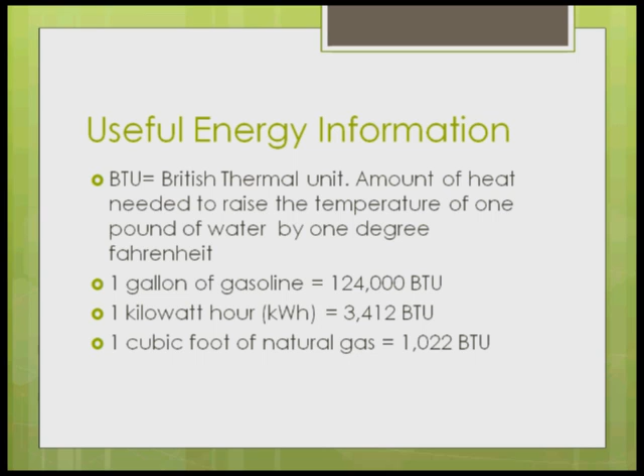So the energy used in a year for a car is 66 million BTUs. The electrical energy, not all the energy, just the electrical energy, is 41 million BTUs. So from this, you could say, well, maybe the car consumes more energy, 66 million versus 41 million. But don't forget that in order to produce electrical energy, we have to burn coal or gas. So if we account for that, a house consumes 130 million BTUs.

So the concept is, in order to produce electricity, we also need to use one of these primary sources of energy—that could be coal, or could be gas. That's why a house consumes 130 million BTUs in a year versus 66 million in a car.

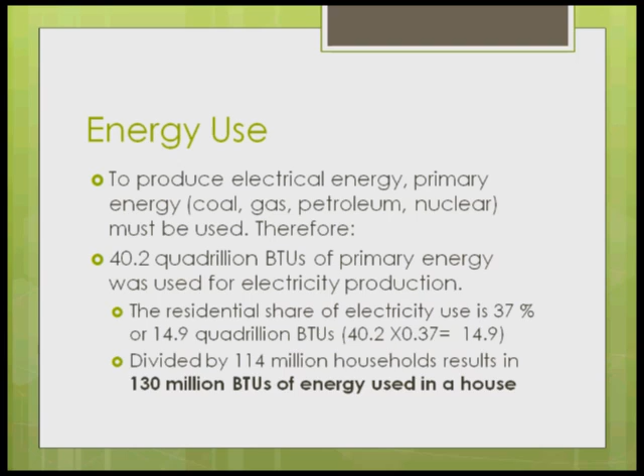Now, in terms of the agenda for today, we were going to talk about energy efficiency. How important is that? And sometimes we just talk about energy efficiency as an isolated topic. But I brought the topic of sustainability because sustainability is about the capacity to endure, to develop in a form that meets the needs of the present without compromising the ability of future generations to meet their own needs.

So when we talk about sustainability, we are talking about three aspects: economic aspects, societal aspects, and environmental aspects. It's no longer, in business, that we only think about the financial result. Our actions have an impact on society and the environment. In the past, these were called the externalities of the financial analysis. Now we are incorporating these externalities into our analysis, and energy efficiency is also involved in this.

How? Because at the end of the day, humans have an impact on the environment. And this impact is through the use of resources such as food, materials, water, and energy. So we have four main ways in which humans impact the environment, energy being one.

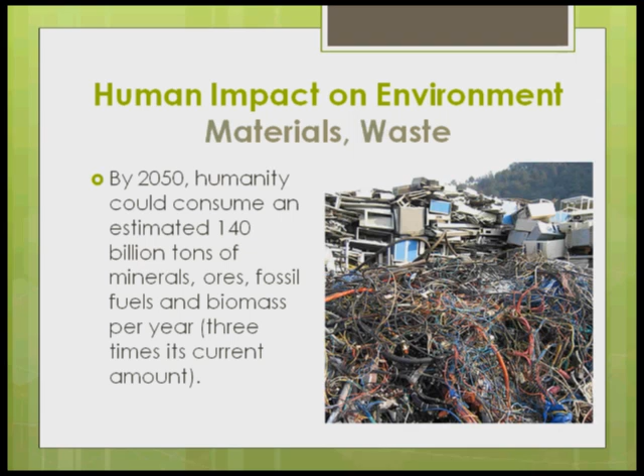Water scarcity is now a topic that's more relevant every day, especially with this changing weather and global warming. So water is another way in which we impact the environment.

And finally, energy. Energy is related to the environment because a study says that through using energy, we are generating more greenhouse gases that lead us to global warming. So the less energy that we consume, the less greenhouse emissions we'll have, and therefore we'll be more friendly to the environment. That's the relationship between energy efficiency and sustainability.

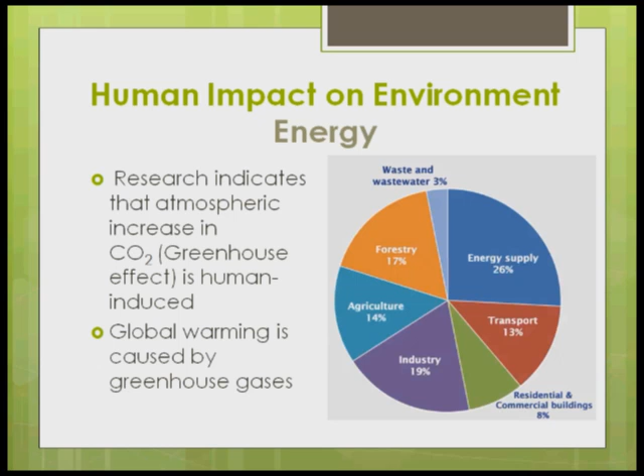Basically what I said: greenhouse gas emissions can be lowered by using energy more efficiently. Electrical generation plants don't need to burn extra fossil fuel to satisfy demand for energy, and therefore this is a worldwide effort, by the way. It's not just the United States.

In Europe, Dr. McKinney mentioned that I also work for another center at Duquesne. In Europe, we have regulations in terms of energy consumption down to the level of products. So some products cannot even be traded in Europe if they don't meet certain minimum energy efficiency levels. And the same applies to other countries as well.

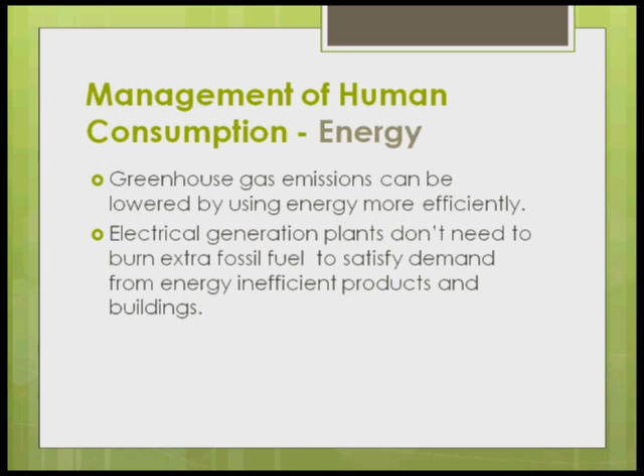So what's the value that these four sustainable practices regarding food, material, water, and energy bring to firms in general? Basically, increased profitability because we waste less material, less energy, less water. We prevent environmental pollution because we maximize the use of these resources. We can enhance employee productivity because there is improved comfort and a healthy work environment. It protects from rising energy and water costs, etc. So there are a number of benefits that come from following these sustainable principles in each of these areas: energy, water, materials, and food.

However, today we are going to focus just on energy.

But before going there, when we talk about energy management, there are three things we have to think about. These are priorities: energy conservation - the best energy that you can have is the one that you don't waste, right? So turn off the light, that's energy conservation. Energy efficiency: if you have to use energy, use it efficiently. And finally, if you have to use energy, if you can use some source of renewable energy such as wind or solar, use it. So these are the three priorities: don't waste energy, use energy efficiently, and finally, if possible, use solar, wind, or another source of renewable energy.

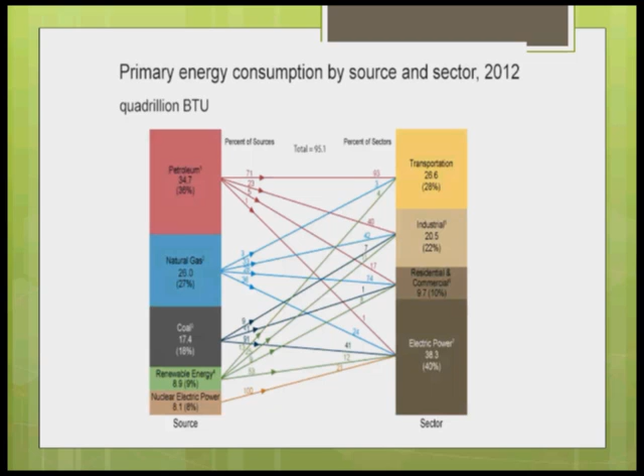So today I try to tailor this presentation more to buildings, because buildings are the ones that consume more energy, and specifically office buildings. It's almost 20% of the energy used in commercial buildings nationwide, and therefore there are more opportunities than in other building types to save energy.

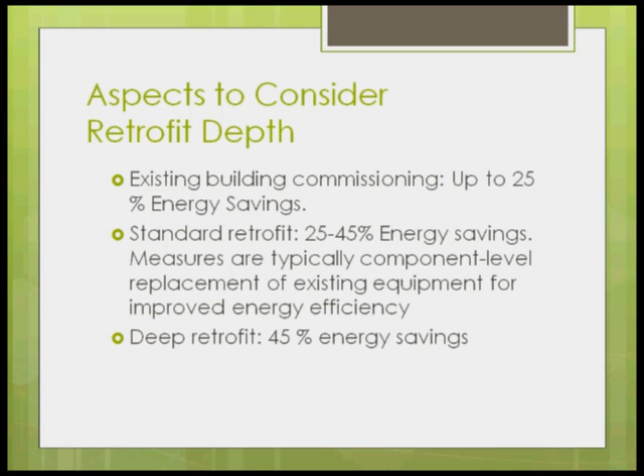When we're thinking about retrofit measures, we have three types. Existing building commissioning, just to check that everything is okay and the building is working as intended — just by doing that, we can save up to 25% of energy consumption. The next level is standard retrofit, where if we change components in existing equipment or improve energy efficiency with small changes, generally less than $10,000, we can save 25 to 45% of energy. A deep retrofit is a complete change of the equipment, building envelope, or certain building characteristics, and in that case we can save more than 45% in terms of energy efficiency.

Next, we are going to talk about the energy saving plan. We know that energy efficiency is important, and we know more or less the numbers of energy consumption by buildings. So what can we do in order to save energy? Well, we are going to plan.

But in order to plan, we can first do benchmarking, so we can compare our energy consumption against other similar buildings, or against past history. You can compare what's going to happen with this building in terms of utility bills now, before, and against what happened 10 years ago, or compare this building against another similar building to see how much energy it consumes in comparison.

So that's one — the energy auditing. We can also make an inspection of all the energy-consuming equipment in a building, and there are different levels at which we can do that. That's another step. After doing that, we can determine and find energy saving opportunities — where can we save energy? There are three levels I have considered for this presentation, listed there. The first two are basically no-cost or low-cost measures we can take. After we have assessed all of these improvement opportunities, we can set a goal to say, we need to reduce the energy consumption of this building by 10%, 20%.

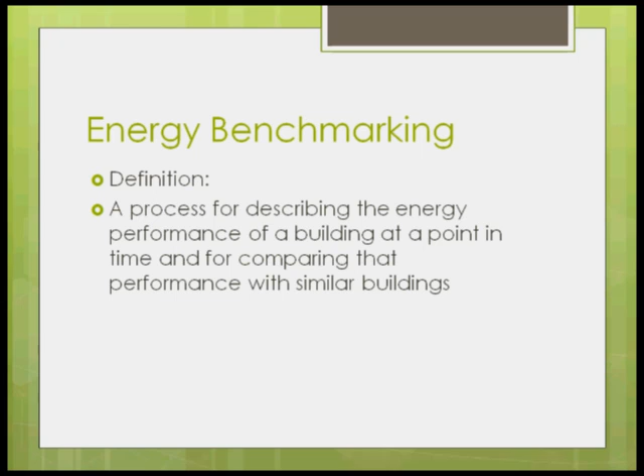So this is the energy saving plans part of the presentation. Benchmarking is a process in which we compare the energy performance of a building at a point in time, could be today, and also compare that performance with the performance of other similar buildings.

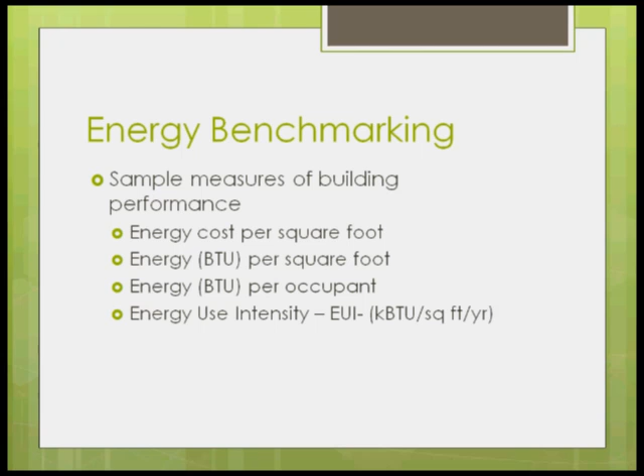Some units that you can use to measure building performance are listed there. Maybe the most interesting is the last one, energy use intensity, measured in kBTUs per square foot per year. That's a unit commonly used to benchmark your commercial building against others.

In order to benchmark your building against others, you can use the Energy Star Portfolio Manager. After you enter all the information asked by this tool, you will get a number associated to the energy use intensity of your building.

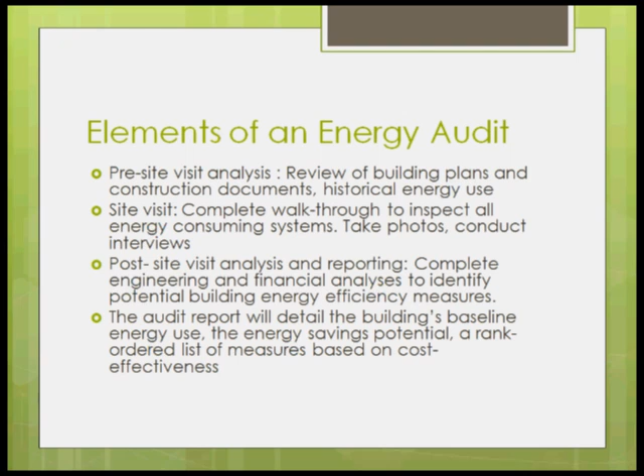Now, these are the elements common to any audit, but we have different levels of audit. The first is the ASHRAE Level 1 audit. It's a very basic audit that consists of an analysis of energy use plus a brief walkthrough of the building to survey which energy consuming equipment we have in that building.

As part of the energy use analysis, usually utility bills from the previous 2 years are reviewed, and the energy use intensity is calculated. Usually the report ends identifying no-cost and low-cost measures. The energy savings estimates are not highly accurate, so this is a very brief, not very in-depth analysis in terms of identifying energy saving opportunities in the building.

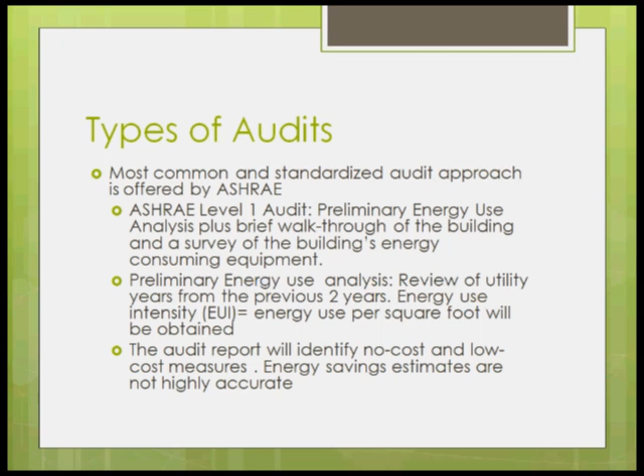The second one is a more complex audit. In this case, there's also a site visit, but you use a more thorough survey that includes all the elements you can find. As a result, the report will include a more detailed engineering and financial analysis, accounting for interactions between systems, like how the heating system could interact with the power generation system. So it's a second level of depth in terms of the analysis.

And finally, we have the ASHRAE Level 3 audit. I have to rectify what I said here: ASHRAE Level 2 just reports some estimated energy savings and project costs, and doesn't account for interactive effects. Level 3 audit accounts for interactive effects because usually the person performing the analysis uses computer models to simulate building and equipment operations, which allows the auditor to account for these interactions.

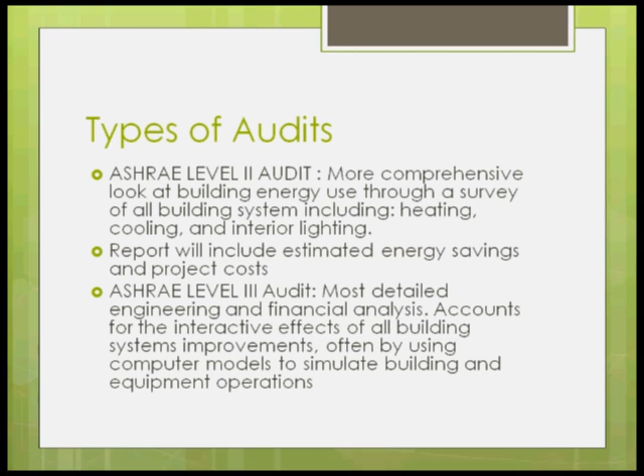Once we have identified all these energy saving opportunities, we can act in different forms. We can change how the tenant or occupant behaves in terms of energy consumption, improve operation and maintenance practice, or retrofit equipment, where retrofitting is the upgrade of a building's energy consuming equipment. Or finally, we can modify the building envelope. I have some examples in the next slides.

Some examples of how you can change the behavior of occupants: protecting the thermostat from unauthorized adjustment. If everybody has access to the thermostat, unauthorized persons can change the temperature, and that can affect our energy consumption significantly.

We can optimize the startup time and equipment sequencing. This is mostly for manufacturing or buildings with a lot of heavy equipment, where you can generate a peak demand once you start a number of motors or heavy equipment. But if you're going to start laptops and small air conditioning units, it's not going to generate that peak. Anyway, a good practice is to always make this sequential, not all at the same time.

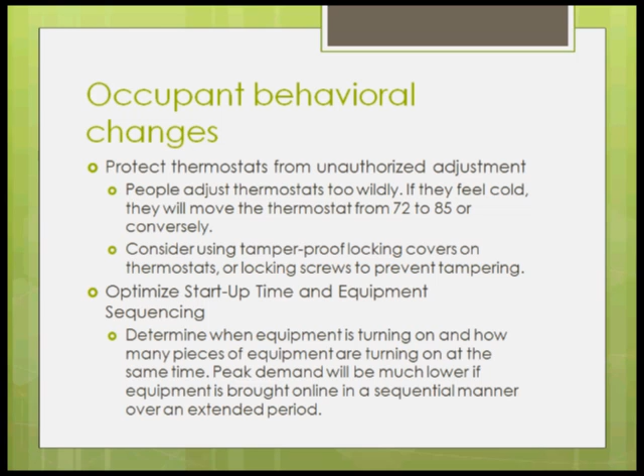That will help not only with your electrical bills, but also the wires—the wires carrying the electricity will not be overloaded. It could happen that you're restarting a number of equipment and all the wires receive this demand, which could create problems in the future in terms of early aging of these wires. So as good practice, regardless of whether you generate this peak or its size, it's good to start the use of the equipment sequentially, not all at the same time.

Another way to change the behavior of occupants is to encourage building occupants to use Energy Star equipment. That should be a must—it's easy to comply with. It's just putting into practice that every piece of equipment purchased by the organization must be Energy Star labeled, meaning it's more energy efficient.

Another easy way to save money is to install software so that the monitor will shut down or go to sleep if it's not being used. That could save a billion dollars a year if we all do this. This is very interesting—I never thought about this.

For cleaning operations in a building, we can plan janitors to go through the building as a team, floor by floor, so you only turn on the lights on the floor being cleaned—you don't have to have all the lights in the building on. We can also install motion sensors so nobody forgets to turn off lights when they leave a room. And why not have janitors cleaning during the day? We can save some electrical power from that.

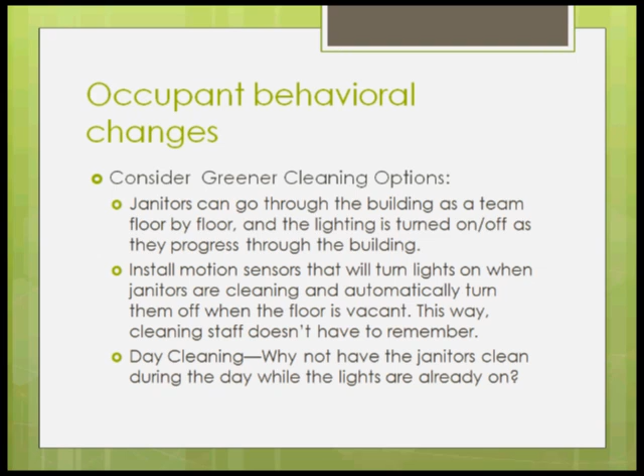Another way to save money is basically to turn off equipment that's not in use.

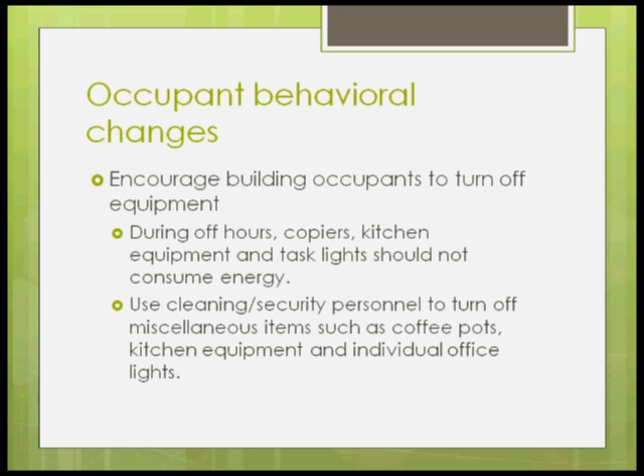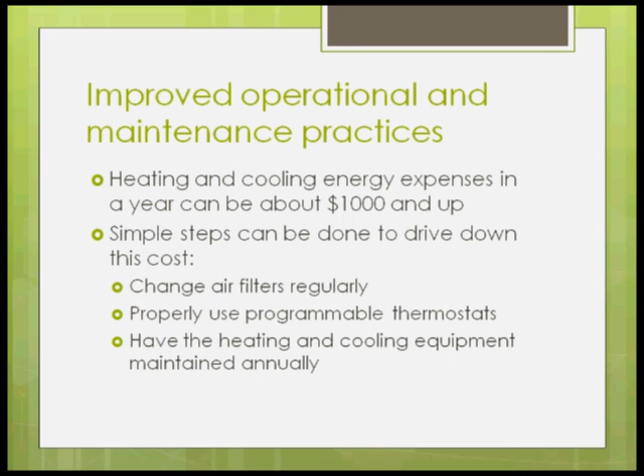In terms of improving operational and maintenance practices, we have some examples—this is interesting. Just changing the air filters regularly, using programmable thermostats—they cost $35 but can save you a lot of money—and having the heating and cooling equipment maintained annually could produce significant savings. These are just some examples; most of you are aware of those, so I don't want to spend too much time on this right now.

These are other quick wins—retrofit options that produce an immediate result. Basically it's trying to separate cool environments from non-cool environments, and replace fans with high volume, low velocity equipment. These are small changes, but they can produce significant savings.

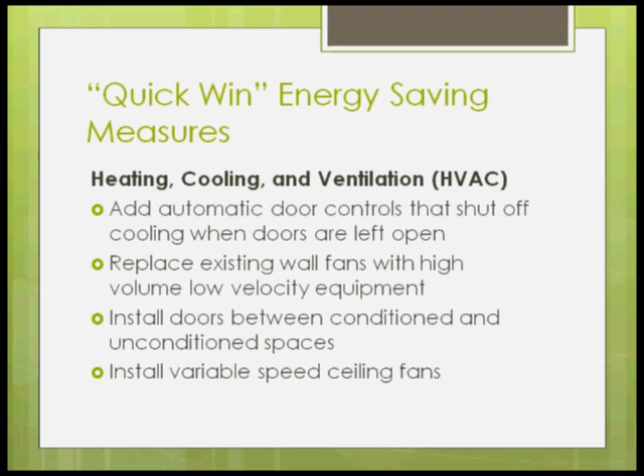In terms of lights, in some buildings there is too much light. You can do an analysis of how much light you actually need, and withdraw some light from certain offices or hallways, and that alone will save you money. Also, you can install occupancy sensors—we mentioned that in the janitors example—and install LED exit signs. Anything that's LED is going to save you money.

By the way, LED light is the future—it's not the present. LED light savings are expected to be in the order of trillions of dollars. LED is the most efficient light you can have. What happens is that the cost is high, so you don't have to change everything to LED right now, because the price of LED lights is expected to come down. But in the future, our future will be all about LED lights.

Also, if you are using fluorescent lights, there are more efficient fluorescent lights. These are the T8 fluorescent lights, so you have to change from T12 to T8. And also, the incandescent bulb is going to be part of history, I think most of you agree. Actually, in Europe it's banned at this time.

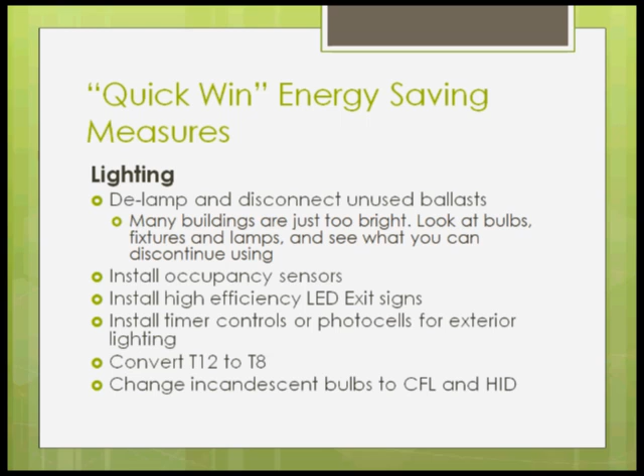One of these alternatives is the compact fluorescent lights that save energy, and the high intensity discharge lamps that also are more efficient. Each type of light has a particular application, has certain advantages and disadvantages. To be honest, I wish I could explain more, but there are so many points to discuss today. I just wanted to present this to give you an idea: there are more efficient lights rather than the incandescent lamp, and the LED is the future for us.

In terms of HVAC equipment, if we are talking now about a very deep retrofit measure, we are talking about $10,000 or more of investment. We can change the entire system, we can change the chiller plants for those buildings that have a chiller plant, we can refurbish boilers. It's very complex equipment that we need to replace, and it's not cheap, I can tell you that. So this is the last, sometimes the first, but mostly for us it's the last thing that we are going to do unless it is really, really necessary, because you need a very heavy capital investment in that.

And usually the return of investment is not 7 years, it could be more than 7 years. For the others that I listed before, usually it's something between 3 to 7 years, up to 11. But for these specific deep energy saving measures, you have to expect that the payback period goes beyond 7 years.

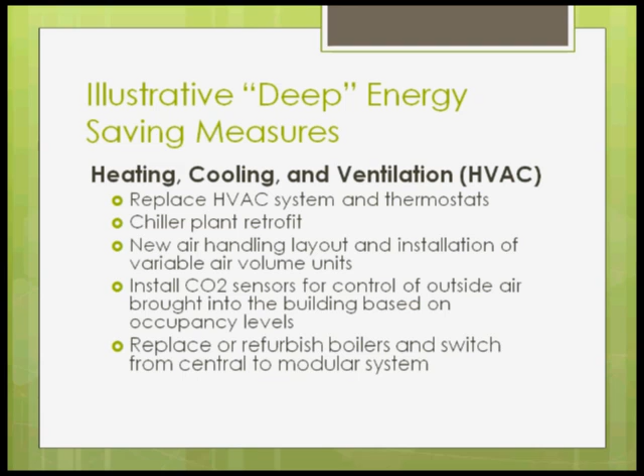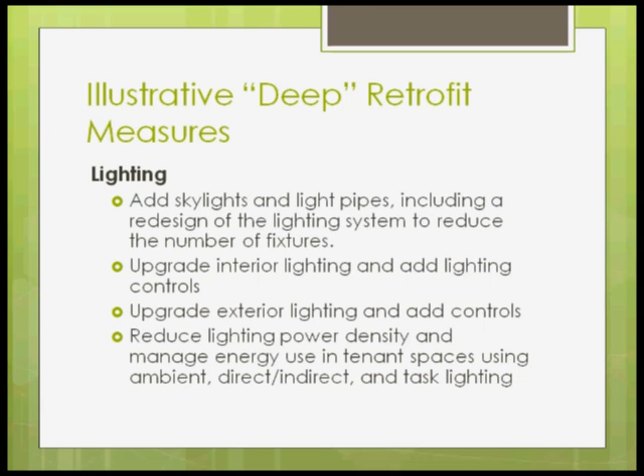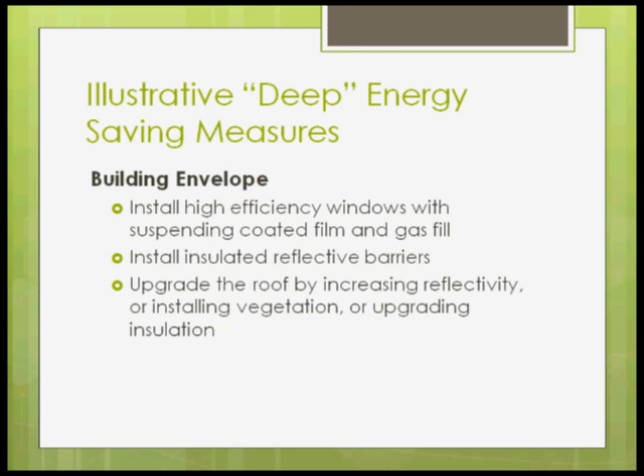In terms of lights, you can also replace lights, redesign the lighting system, upgrade exterior lighting. There are many things you can do in terms of moving around the lighting fixtures. In terms of building envelope, you can install high efficiency windows, insulated reflective barriers, and install vegetation on top of the roof as a way to increase reflectivity, providing less warm environments. It's a kind of insulation that you can use with this vegetation on the roof.

Or you can set threshold goals, which are the minimum acceptable goals in terms of energy consumption that you set for your building, or stretch goals that go beyond the minimum and can incentivize people to take more extreme energy efficiency measures.

Once you have set the goals, the next step is to plan and implement. You need to define specific steps and targets, determine the roles - who, which resources we are going to use - and determine which ones are going to be done first.